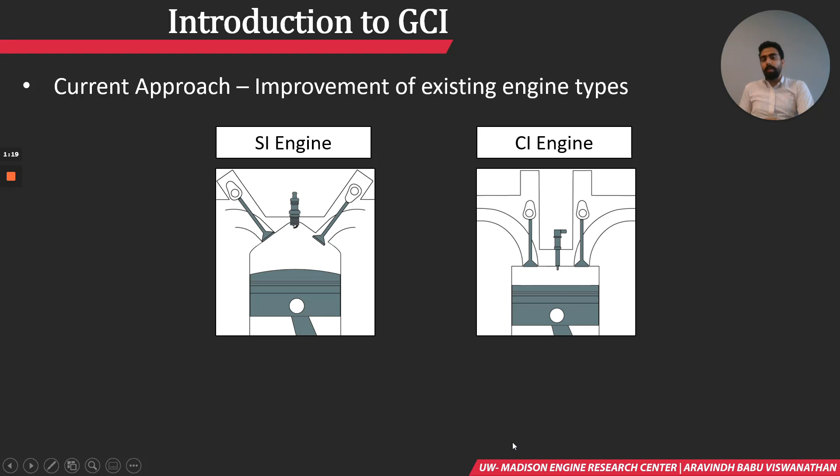On the other hand, CI engines operate on diesel fuel. Because they use diesel fuel, they make high soot emissions, but the nature of the combustion process means high efficiency, so low greenhouse gas emissions. One of the more promising approaches that we believe will take off in the future is the use of gasoline in CI engines to combine the respective advantages of both of these styles of combustion.

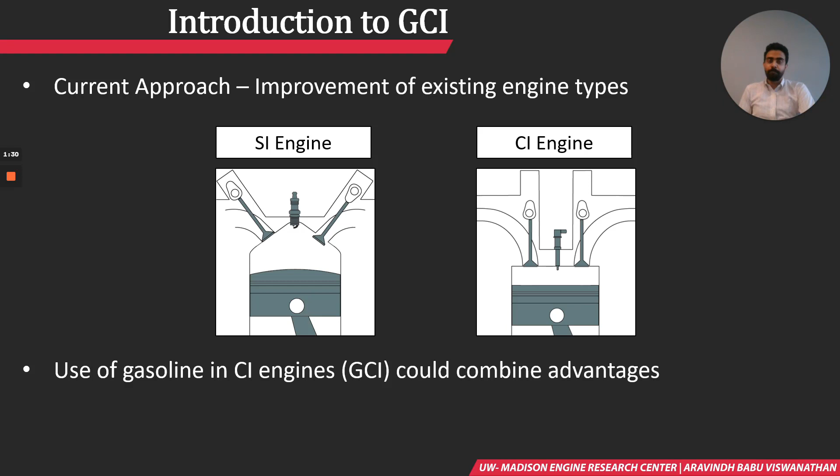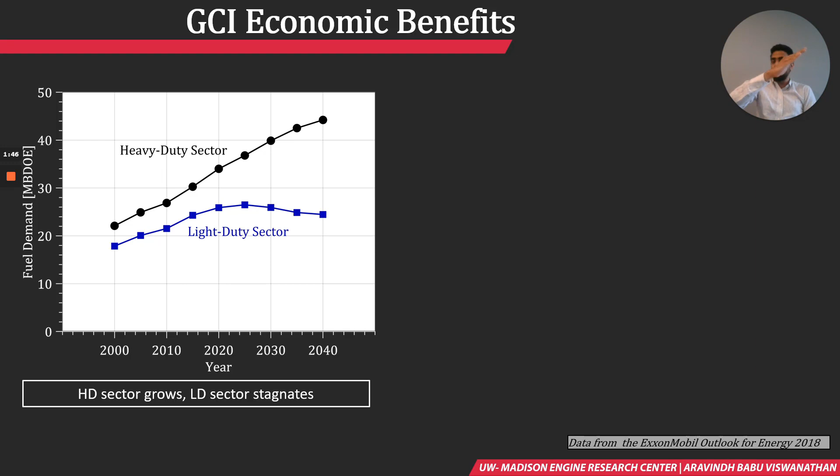There are also economic benefits to GCI on top of the emissions benefits that I just talked about. Consider this plot of the fuel demand based on sector that is shown here. The projected demand into 2040 tells us that the heavy-duty sector is projected to grow, whereas the light-duty sector is expected to stagnate. Contrast this with this plot of the same fuel demand now divided according to the type of fuel. We see that diesel fuel is expected to grow in demand where gasoline fuel is expected to stagnate.

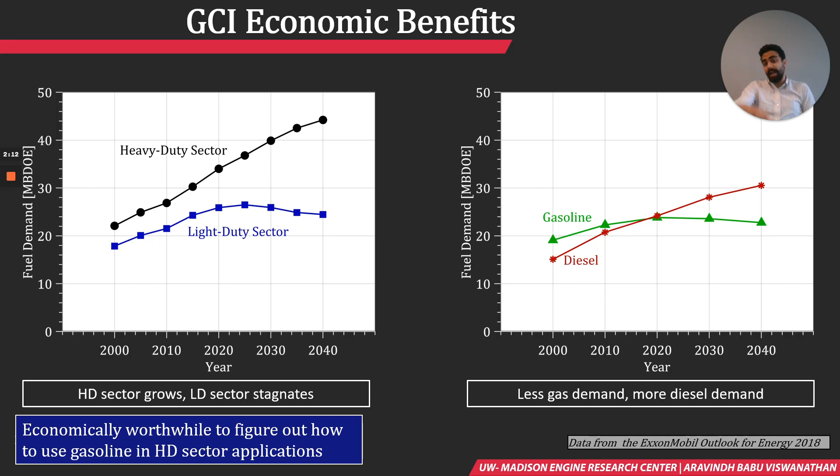The takeaway from these two plots is that if we find a way to use all of that excess gasoline in the heavy-duty sector, that could create some major economic benefits for the end user, making this also economically worth doing.

Some background on GCI. It was first proposed and demonstrated in 2006 by Dr. Kalghatgi, in the paper that they published. The reference is down here below. In the 15 years since that time, a lot of research has been done that shows that those emissions benefits that I was talking about a couple slides ago, in terms of low greenhouse gas and low soot, do exist. The problem is that those benefits primarily exist at the medium and high loads. But at the low loads, there is the issue of unstable combustion.

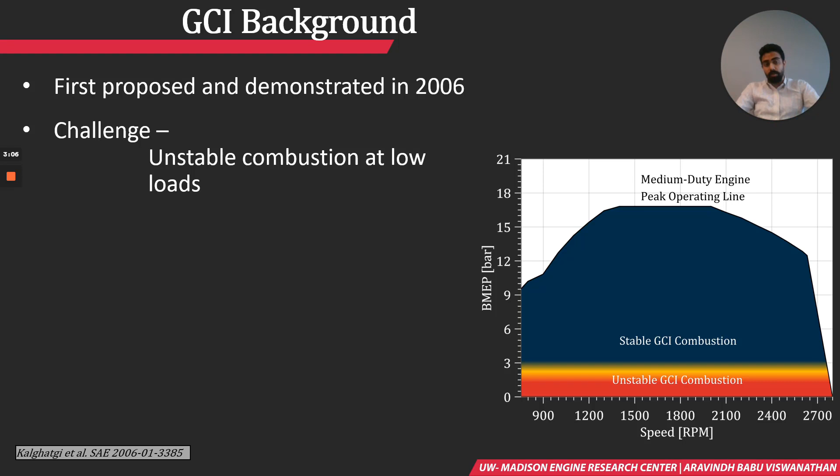Take a look at the plot on the right, which shows the operating map of a typical medium-duty engine. You see that large blue region where GCI is stable and where you see those emissions benefits that I was just talking about. The problem is that little red and yellow band down below where GCI is unstable. To access those emissions benefits up top, you need to figure out how to get around the issues down here at this red band below.

That is the topic that we're proposing: cylinder deactivation at those low loads could help us avoid those regions where GCI is unstable, leading to being able to access the benefits at the higher loads. If we are deactivating cylinders, then there are fewer operational cylinders. So to make a given engine load, those fewer operational cylinders need to be operating at a higher load, which then means that they're in a stable region, and so they're not going to have any instability issues.

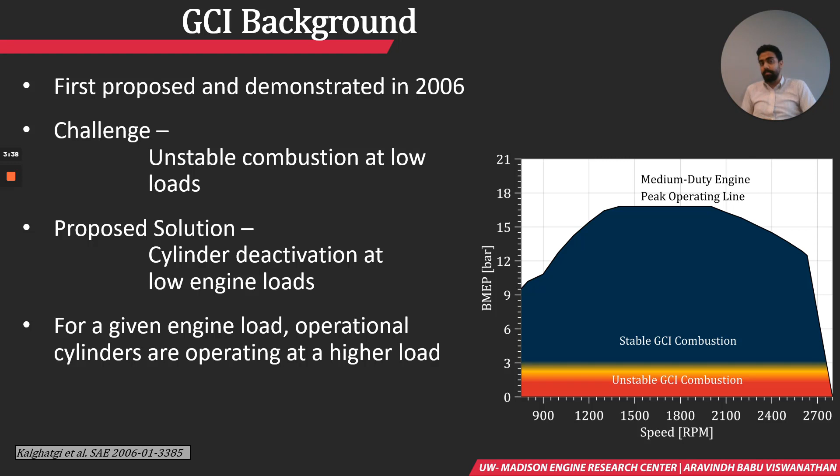But first, let's take a second to understand what it means for combustion to be unstable, because that's not something everybody may be familiar with. Technically speaking, combustion instability is the cycle-to-cycle variation of combustion. If I measure 500 cycles of data and I plot the pressure trace for every one of those, how much does it change? Or if I plot the heat release trace, how much does it change?

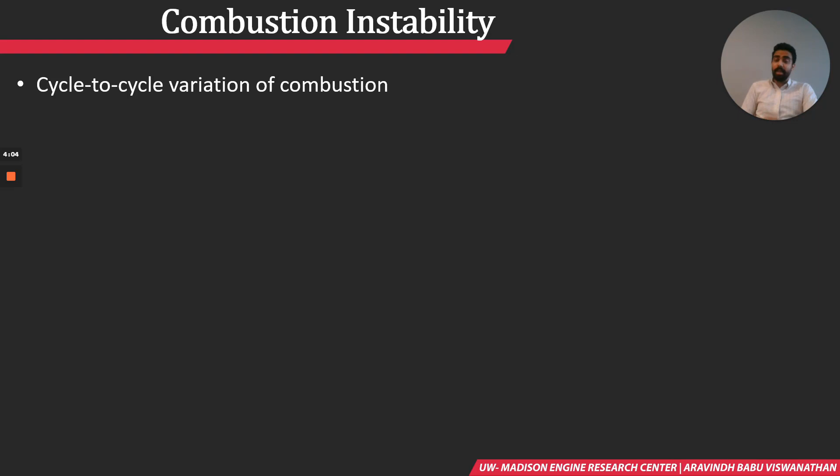Mathematically speaking, it is quantified by using the coefficient of variation, or COV. In this presentation, I'm just going to call it the instability, but you should know that mathematically we're calculating that by measuring the GIMEP over 500 consecutive cycles and then calculating the COV of that.